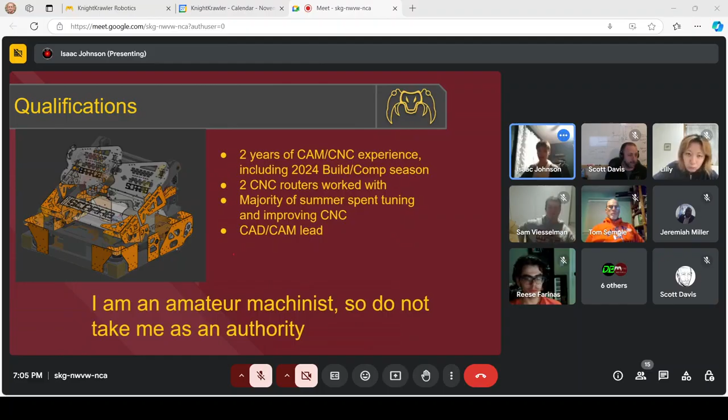So here's some pros and cons of, oh sorry, there's a thing at the top of my screen. Here's some pros and cons of our in-house manufacturing. So it's nice to be able to fix or modify parts during production, say halfway through a cut.

We find out the part has a flaw, we can just stop it, and we don't have to waste a couple days fixing that. And in the same vein, we have a quick lead time, maybe about an hour between finalizing a part and getting it ready for being put on a robot.

As opposed to, I'm not sure how long the lead time is for other teams, but I've heard it can be pretty long. Also operating CNCs gives valuable experience for the students on the team, and also insights into optimizing designs for manufacturing to make it quicker or easier or even possible if your design is not really optimized for that.

Then the last pro I could think of was after your upfront cost, you only have the material and tooling costs as opposed to paying for a part to be professionally milled or having a sponsor have to do it.

So some cons with that are there's a time investment in setting up the machine, learning to use it, setting up new tooling. There's also a steep learning curve in learning how to actually do all those things and in getting your parts to go quickly and not destroy your tools as you go along.

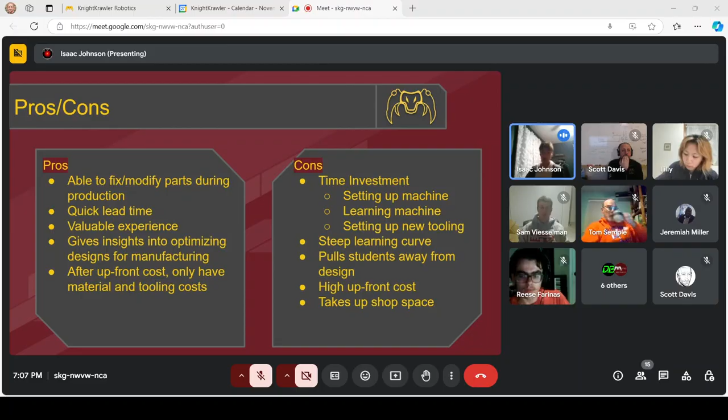Then, if you have a student doing all of your CAM work, it pulls students away from design and from other tasks they could do that they might prioritize. There's also the high upfront cost and the cost of shop space that the CNC takes up.

So some ways we've dealt with cons are for the time investment issues.

I've dedicated my off season to setting up the hardware, software, bit profiles, and getting our CNC ready for the challenges of the season. You can also experiment during downtime, say you just finished your last part and have the next 20 minutes free.

You can do some test cuts, work on improving your tooling, stuff like that. For the learning curve issue, you can start off by milling with easier materials like wood or plastic, and there are many videos and tutorials to learn best practices. I've seen a lot of stuff from Titans of CNC and Stoney CNC, and I've actually incorporated some of what their videos have taught.

You can also use your alumni and sponsor connections for resources or help. We actually had an alumni from 4 years ago help set up our CNC for the 2023 season and got us started with tooling and showing us how to actually operate it.

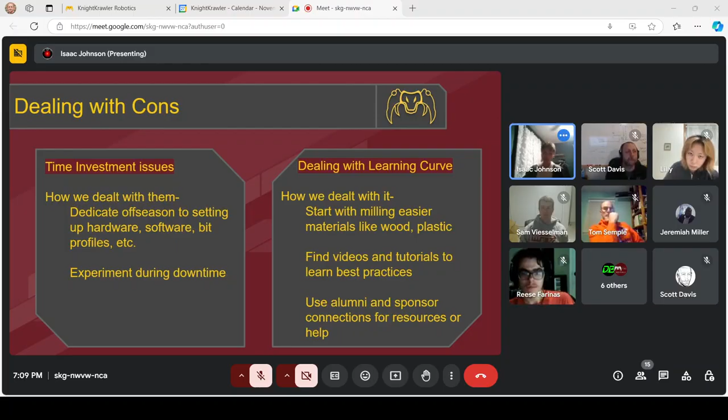For dealing with pulling students away from design, you can either have a mentor who's willing or able to machine if it's not a priority for your students to machine, or you can have multiple CAM students switch out machining duties. What I like to do is just CAM outside of meetings using all the available time that's not for schoolwork.

If you have a limited shop space like we do, we have a very small closet, you can place it in a shelving or low traffic area. We had it in the back of the shop for a year, and now it's tucked away, accessible but out of the way.

And lastly for that, you can also put the CNC in a mobile enclosure and just wheel it around.

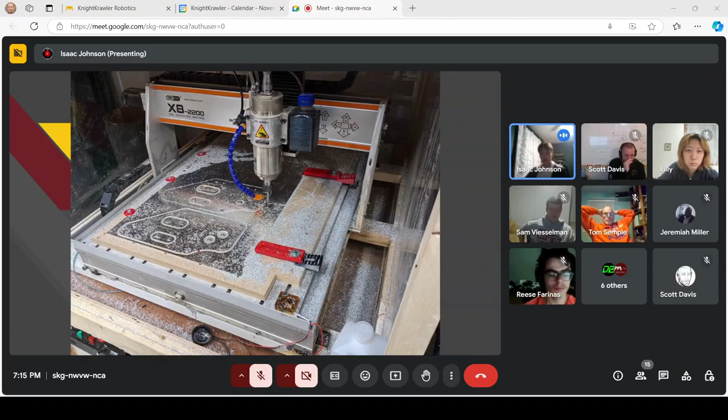And it's a good amount of effort to put the screws on because you can't just cut out your holes and keep going. You have to cut out, pause for maybe a couple minutes to secure the part, then keep going, which in the long run isn't too much of a hassle.

Something to keep in mind with using vises is when you're doing a contouring operation, you have to leave some clearance so you don't hit the top of the vise, which means there's a little pad at the bottom that you can't cut. So you need to flip it over and then mill off what you're holding onto before.

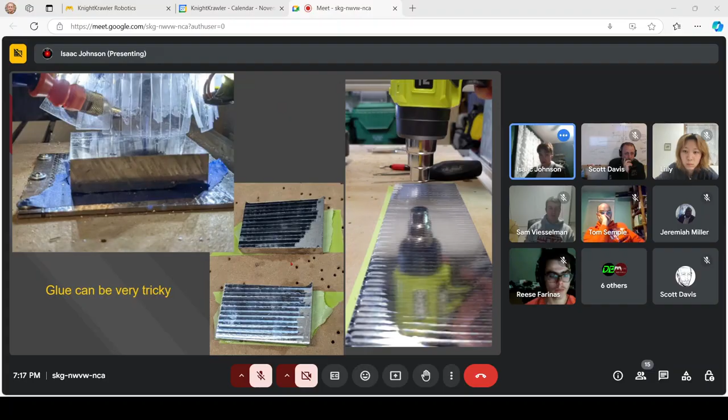And this is with a surfaced wasteboard. So to really get a good stick with your tape and keep large parts on, or especially smaller parts, you need to make sure you're dealing with the heat and have something flat to work with.

Then another thing about preparing your operations and actually mounting them is it's really nice to have a way to square or align your fixtures or stock that you put down.

So one way to do this is dowel pins, which I've played around with a bit—you either mill a hole into your wasteboard or your CNC or router table, and then put a pin in there that you can brace your part up against, which is nice.

Say you're doing a really small part and you're gluing it and it flies off. When that's happened to me using dowel pins, I can just take the tape off, retape, re-glue, then put it back exactly where it was and keep going with the new operation without even having to change to zero.

Another way to make sure you have a really accurate and square, secure part is, if you're using a vise, to square it up against your CNC or router table or wasteboard, using a square as your reference.

The last thing I want to talk about for this slide is squaring the side of your wasteboard. If you look at the bottom image, there's a ledge on the bottom because I ran a 1/8 inch bit along the side and cut that side of the wasteboard square, so I could put a square up against it and know that my stock is square.

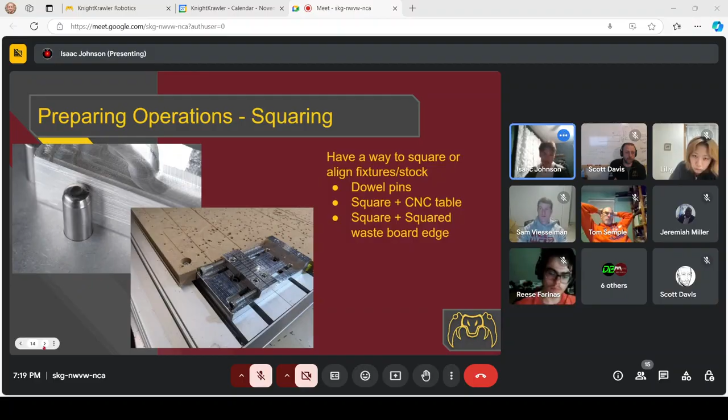Another thing about actually preparing your operations is a lot of the time your stock isn't flat, which is really annoying, but it can cause slight inaccuracies in your part, and it might lead it to not mount correctly onto where you're mounting it on the robot, or it might not be easy to put on the router.

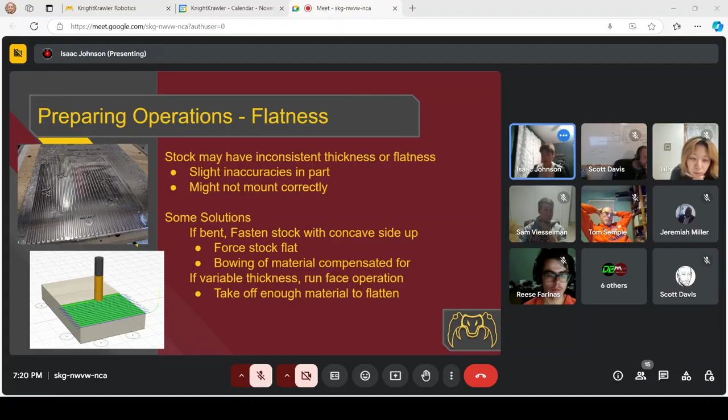A couple solutions: if it's sheet stock, fasten it with the concave side up so you can force the sides flat and cut it normally, compensating for the bowing of material. Or if it's a thicker piece of stock with variable thickness depending on where you measure, you can run a face operation, taking off enough material to flatten it. Then you can either go from there or flip it and flatten it again so you have a nice flat surface on both sides.

I've got an extreme example of some bowed sheet metal. The top image is some 0.1 inch aluminum for reference, but the bottom image is a piece of stock we've had forever. It's about 0.125 inches, but it's practically useless because of how much it bows.

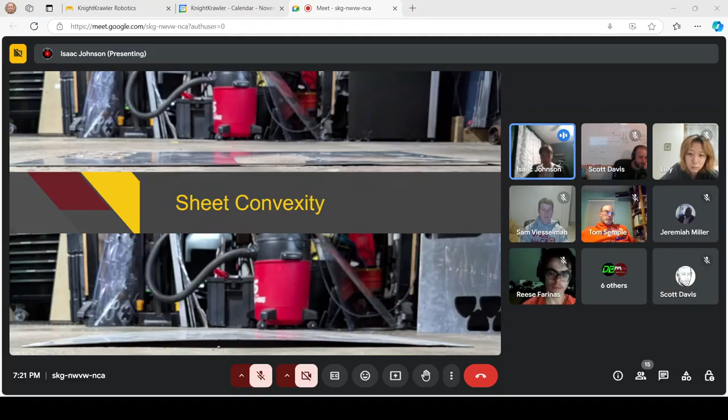If I were to use that, I've in the past cut off small strips of it to deal with the bowing, because it's less extreme over small areas. Or if I really needed to, I could secure the ends and really screw it down.

Then, say you really want to go for accuracy in a part, what I like to do is test tolerances. I've had some bad experiences with just trusting what I put in CAD to be accurate, especially using, say, a hex shaft or press fitting.

Some ways to make sure your part is as accurate as you can make it is to do a finishing pass, where you cut the full depth but leave some material on the sides to take off later with really small finishing passes. Or spring cuts, where you either have extra cuts where you mill it normally, then run your bit along the edge a couple times without taking off any extra material to deal with deflection.

It might cut more material than the first pass, just because the bit had more force pressing it up against it and deflecting it. So to get really flat sides or flat cuts and a really accurate part, it can help to do a spring cut. Then say you're doing a hex pocket like in the image here.

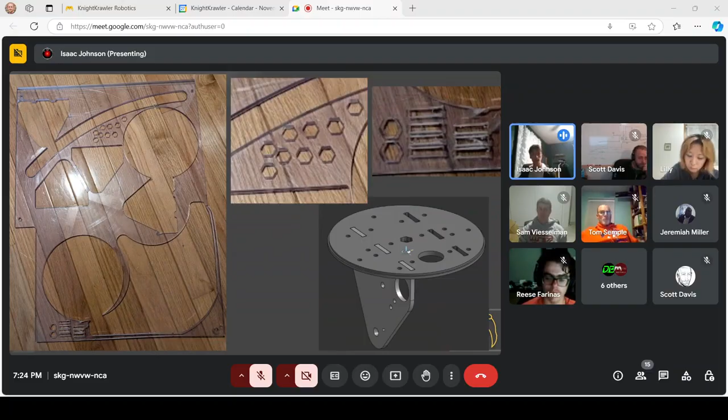I've actually got the piece of stock that I was testing on, right here. In the picture, I have a lot of hex holes, a lot of those little dog bone holes. I went and ran a ton of these operations to try and dial in the dimensions in the CAD that had the right tolerances, so I could get a really exact fit.

Speaking of accuracy and fit, here's a really wild concept: milling tools are round, but something less obvious is that this means they cannot cut sharp concave corners.

So I like to add pockets to corners and then use small tooling to minimize the size of the pockets. Or if you really want a sharp corner, you could file down the part. Or if you're putting a fitted piece in there, you could round the edges of the fitted piece instead. I've got a diagram of this.

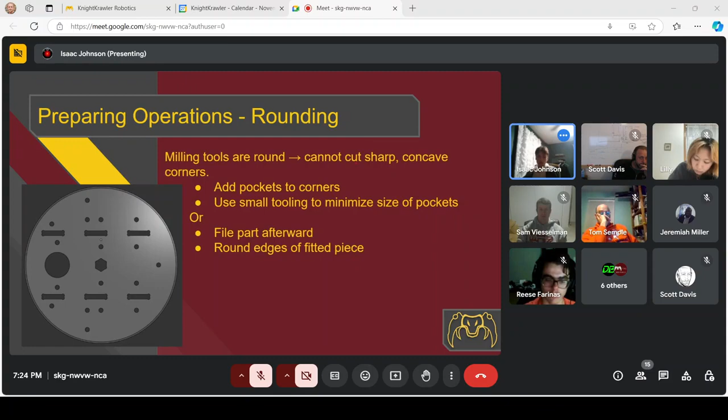Sam? Yeah, sorry, I didn't mean to interrupt you there. But I was curious, when you add those little rounds, do you do that as part of your CAM operation, or do you actually go back into your CAD model and do that?

Oh, that's a great question. I do it in the CAD - it's a little annoying to do, but I take an arc and set the radius, then make it. I put the midpoint of the arc on the tip of the hexagon, say if I'm doing a hex slot, so I do add that in CAD.

I've got a little diagram here of without the pockets. Since the bit is round, it's not going to be able to enter into the corners, and I've found that Fusion does not let you overcut to make sure you get a sharp corner - it just rounds it for you. This can be negligible if you've got like a 16th inch bit, but with an 1/8 inch or a 1/4 inch bit, you need to add pockets so you can tell the end mill to go straight in there and actually get your hole.

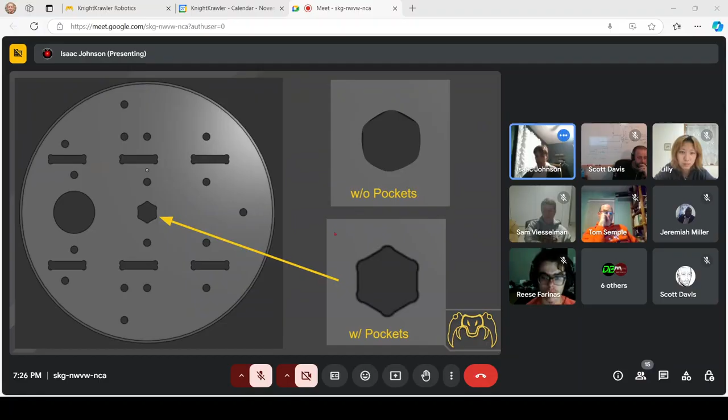So I add a little radius to all of my 90-degree interior pockets. Let's see.

Say I want to secure a bit of stock with screws or hold downs - I always make sure, and I've had issues with this in the past, to offset my zeros so that I'm at least 1.5 times the bit diameter from the screws and hold downs. Because say you're doing an outside cutting pass on your part, if you don't do any offset at all, there's a chance you run into the screw, and I've seen a lot of sparks fly from that - I do not want that to happen.

So just adding a little offset can prevent some tool wear, and make sure that if you're cutting out of a piece right on the edge, that offset can also ensure you don't run out of space on the side to cut.

Dr. B said, oh hey. Isaac, thanks - I'm from 2530. Thank you for this, by the way. It's really, really cool because we're just starting our adventure figuring out how to do this.

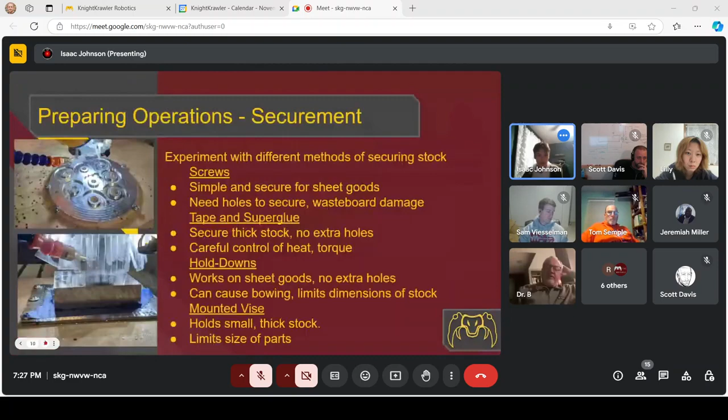Yeah, where is it? So we have T-nuts that slide into these slots, and it's hard to see in this photo, but right here we have some button head screws. So we just do T-nuts and button head screws.

We don't slide the T-nuts in first - we put them on the actual waste board, then slide it in just for ease of putting it in. And then you'd square up the board by cutting the edges with the tool, and then you'd surface the waste board so that it's flat, and then you do all your stuff.

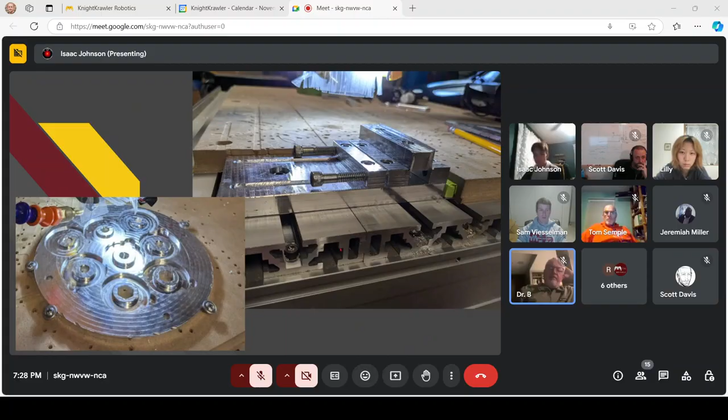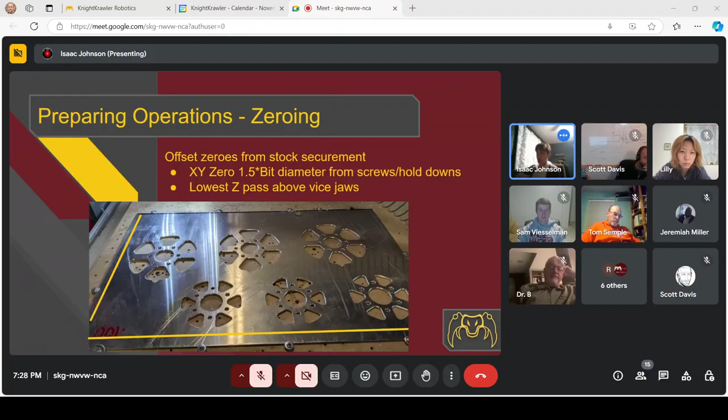Where was I? Oh yeah, so add a bit of offset. Also, if you're using vice jaws, make sure your lowest Z pass is above your jaws, just so you don't have to remill those because you ran into them. Any more questions before I move on?

Scott asks Isaac: when you're setting up your finishing passes so that you can take care of bit deflection during your regular cut, are you just doing one finishing pass, or are you doing multiple finishing passes?

It depends on the part. I like to do one finishing pass if it doesn't need to be too accurate, or maybe even none if it doesn't need to be accurate at all. But I'd go to two if you're trying to get a press fit or a close fit, or maybe even three.

I know you've done a ton of optimizing over the summer and I haven't seen the results, but in the past, when cutting stock that's bowed, we would always set up a couple of air passes so the bit would run along the top and shouldn't touch anything. But if your flat stock is bowed, it ends up taking some off so you don't take too big of a bite with your end mill and cause chatter. Are you still doing that, or does the way you've set up your milling with ramping alleviate the need for air passes?

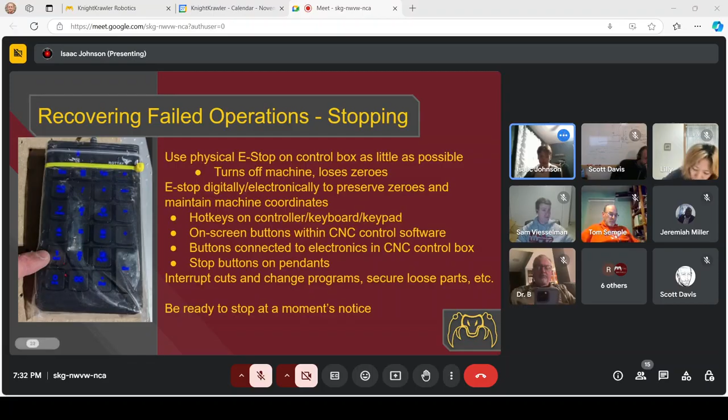So say you have a part you forgot to secure and you started a cut - you can just pop that button, move your spindle, secure it, then keep going. I always like to have this number pad ready, holding it while a cut's going on.

Then say you actually lost your zeros - say you had a power outage during an important cut, which actually happened this last year. A couple ways to deal with that: you can preemptively mark a zero point on stock just to be super careful, then reference off that point and keep your original zero.

But say you already cut some holes into your material, you can use any reference point - a hole, a specific contour, really anything you already machined - and line up your spindle with that. In the CAM software, here I've got an example of Fusion, where I go and change the zero to that reference point, then re-export all my operations to use that new reference point. So I zero at that hole and all operations go on as normal, which might be a bit off, but if you're careful it should only be maybe 100th or 5,000th max, unless it's a really big hole or something.

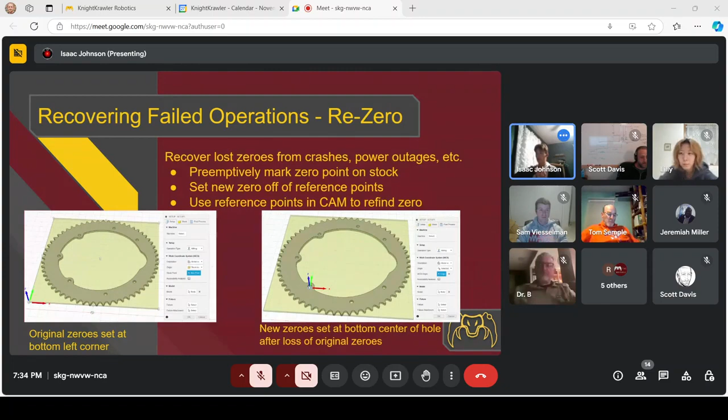Another option is to use that reference point to measure its distance from your original zero, then move that distance and reset your zero where you think your original zero was. I've got bigger pictures to show that I moved the origin with the stock point, or selecting the stock point in Fusion.

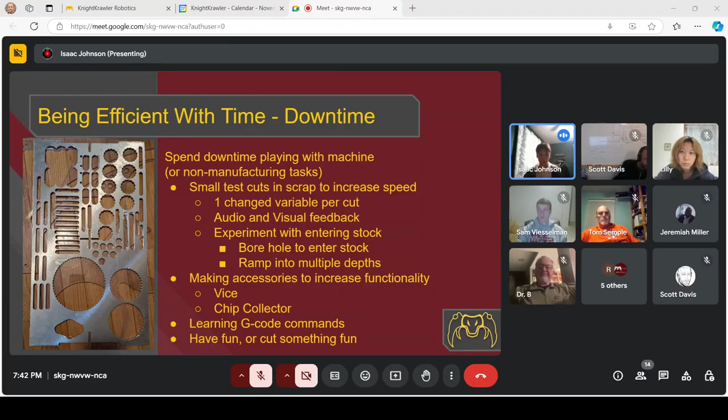Another thing I like to spend my downtime doing is making accessories for the CNC to increase its functionality, like making a vise to be able to cut smaller, more 3D parts easier besides gluing them, making a chip collector to reduce the amount of cleanup during or after a cut, and learning G-code commands just to get a better grasp of what the CNC is doing, what's being told. I also like to have fun with the CNC, like cutting a little Star Trek Delta insignia when I had a chance, just playing around with some brass.

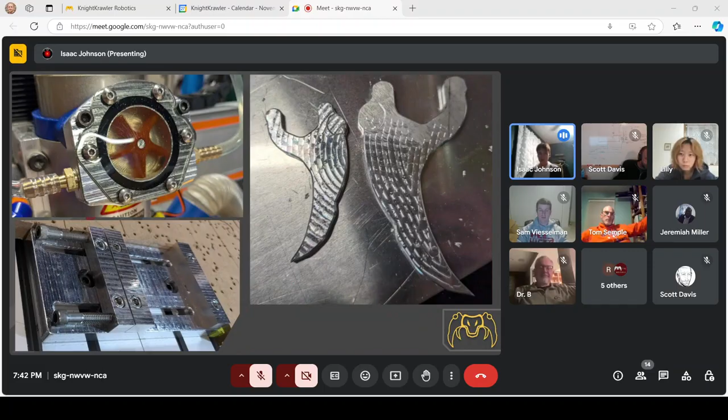Here we've got some examples of little projects I've done. I've got the vise I mentioned earlier, and some replacement wrenches for what we actually use to tighten our collets, because the ones that came with the CNC aren't the greatest. I've also got an indicator to show that coolant's running. So there's a lot of fun things you can do with the CNC that can make it work better. I'd spend time looking into those.

Along with working on improving your efficiency cutting, also work on improving your efficiency when actually programming using Fusion or Mastercam, whatever you use. I'm guessing there's an analogous feature in Mastercam, but Fusion has a thing called templates where you can right click on a program or an operation and save it as a template to use later. So you can save a specially tuned program, say you're entering a certain way and you want to keep it and apply that to another program.

Or I have multiple bore operations where it's preset with a tool, and I just bring in the template, and it automatically selects all of the holes that tool can cut, and it can do that real quick. So you can just have preset options for operations.

To make these templates takes a bit of time, and to improve them also takes a bit of time. So use your time off season to make it so you can program quicker. You can also update your templates if you learn something after a cut, and there's always new things to learn with them. A lot of the time you can go faster. Sometimes that's a bad idea, but most of the time it's a good idea to go fast.

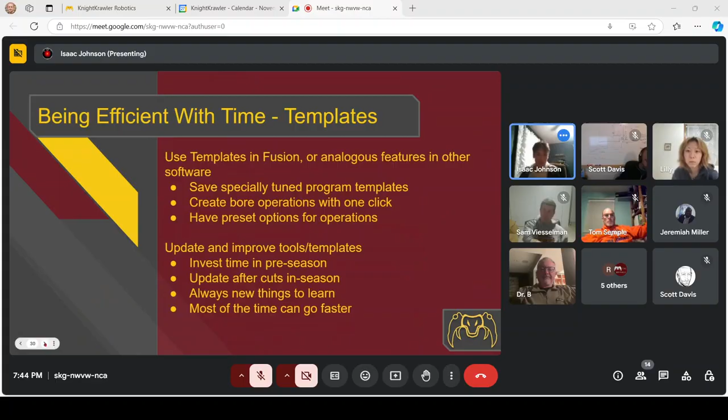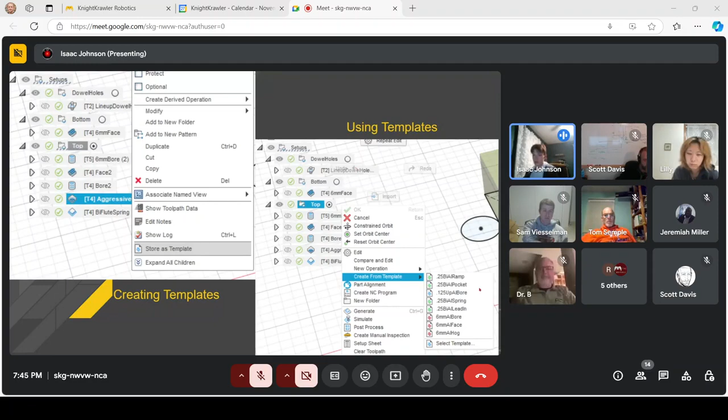So then I've just got a quick rundown for actually making a template. You right click on your operation, then there's a little store template box where it brings you to a new window to actually store it. Then to call upon it, you make a setup, right click on your setup, and choose create from template, and choose either ones you've used recently or ones from your general library.

And then, if people need, I can go over what a setup is and stuff.

But the last thing I have in this section is dealing with burrs. It's really nice if you're able to limit the amount of work you need to do after machining. Burrs are a big part of that because say you've got a plate right in the middle of a robot—I've put my hands in robots, I've reached in there, and I don't want to come out with a lot of cuts. So you need to make sure your parts are deburred and that they're safe. You can limit the amount of deburring with a chamfer end mill, just having the machine cut off all your burrs and give it a nice finish.

A spring cut helps, maybe not with an upcut bit, but a spring cut can take off a lot of your burrs, especially if you've got some remelted material on your part. And then my favorite, you can outsource your deburring to programming, because I've talked to some programmers and they love to deburr. Apparently it's relaxing, so keep that in mind.

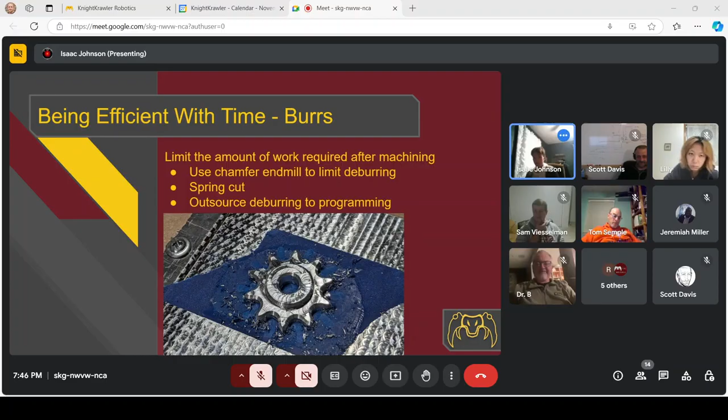You can outsource the manual labor. Okay, well what was your question, Dr. B? Actually I have two. I love outsourcing the programming. We have to steal the parts so the mentors don't do the deburring, because they love it too.

So honestly, two things. One is if you could share what you do for lubrication and your little lubrication flow meter, that would be really cool, because we have not done aluminum at all and don't know what to do with that. So what you've used for equipment, solution, and your flow meter would be cool. And I forgot my other question, but by the end of your answer I'll remember it.

That flow meter was for a water-antifreeze mix we use for our spindle, because it's water cooled. So that just shows it's actually being cooled and you're not generating a ton of heat accidentally.

But for our coolant, we use, I don't remember what they're called, but an adjustable tube. We blast our part, or the tip of our bit, and in general our part, with isopropyl alcohol, because it cools the bit and gives a bit of lubrication. It also evaporates in air, so if we accidentally soak the table or give way too much, over time it'll just go away and we won't damage our table, assuming we don't give it too much.

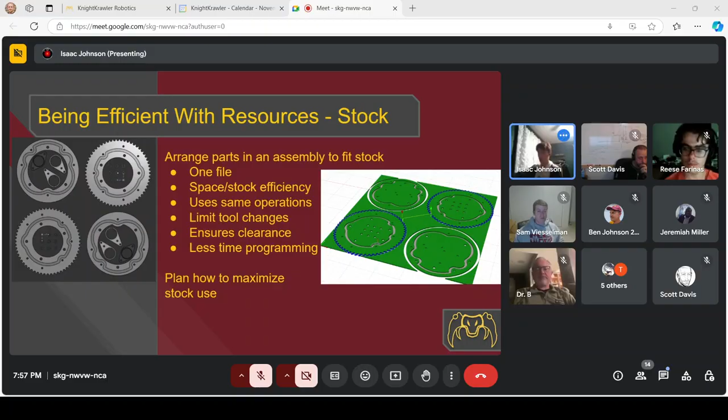I've got an example of how you can use the same program with the same file. So I have this arrangement of parts here. In Fusion, I have just one operation that does all of these bores, and that's with one tool, no tool change. I go through and do all the holes, then I can go through and do all the cuts with a larger 1/4 inch bit. So that's considerably less programming for the amount of parts you're making.

What's your question, Dr. B? I'm just wondering, after you do that first bore operation, do you then screw those parts down through those bore holes? Because we use tabs for some things, but those are painful. So obviously if you're doing a tool path and pausing to change your bit, do you just figure out which things need to be screwed down and screw them down?

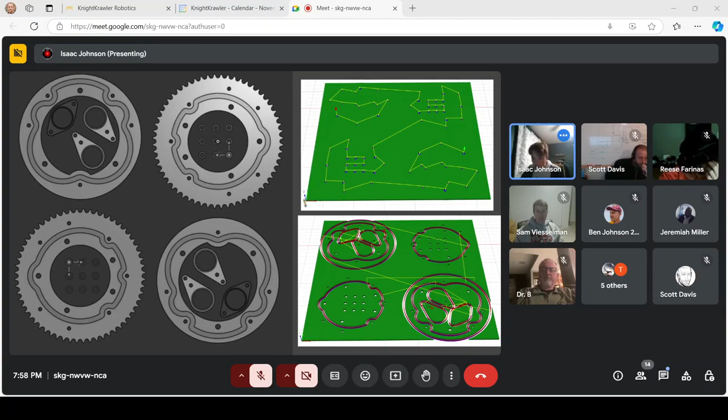Generally I try to have the laptop I do the CAM on near the CNC, often facing it, so that I can reference which holes I can secure and which ones I can't. This is really small, but say one of these holes on the ends of these parts is really hard to secure, and I need to know which hole is for that part because I need to use a special type of screw with a smaller diameter. So I generally secure those as or after I've done a tool change, just because the operation's already paused.

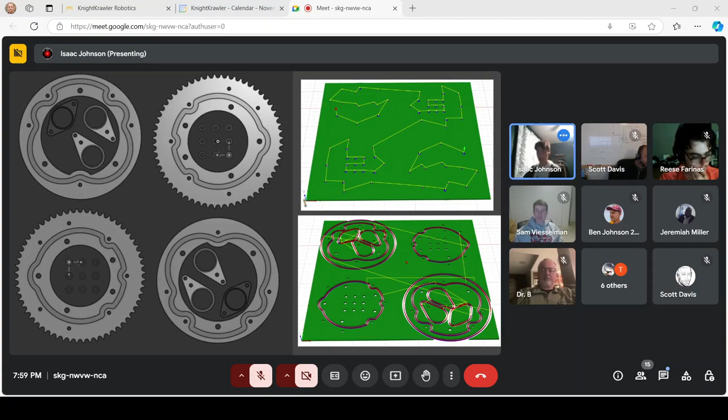So speaking of tabs, another way to be efficient with your resources is to save your cutouts. I like to secure a large cutout - say I have a part with a really large open middle, I like to save the cutout as scrap because then I can use it to test settings or make smaller parts. It's also faster to do a contour cutting operation than a pocket operation where you cut out all that extra material.

Some ways to secure those: if you're using screws, just drill the holes to secure it manually, or make a manufacturing model, which I'll touch on next, to have the machine cut out those holes so you can secure it along with the rest of your stock. If you're using tabs, it's easy - you just add your tab settings, but it's a pain to deal with, especially with aluminum and if your settings aren't dialed in. With glue and tape, it's pretty easy to keep your cutouts as long as you keep your stock cool and limit the force on the part. And if you're trying to save a cutout with a vise, I don't have any suggestion for you because that's not a good idea.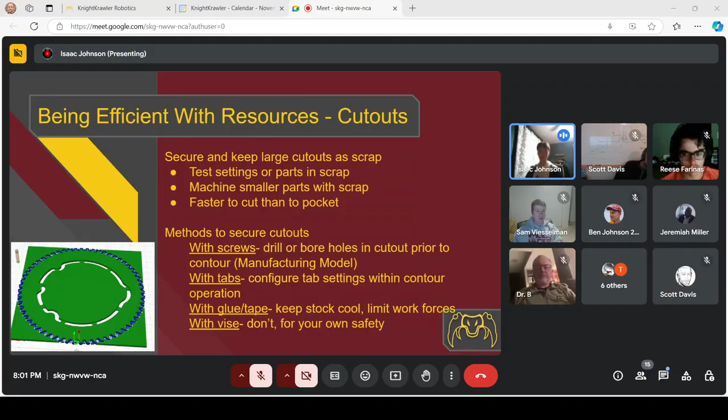Here's a diagram of the process for saving cutouts. What I like to do is make a manufacturing model where this is the original part, without that middle piece - normally it's got a big hole here. In the manufacturing model, done in a separate document, I make an offset for all these curves, offset by the width of the bit I plan to use. Then I make an extrusion and add holes to it so I can secure it. I add a little channel between the actual part and the extrusion in the middle I want to save, and make that channel 0.001 or 0.0001 inches thick so the inside and the actual part are the same model, allowing me to export it as one file and use those holes in the CAM software. When I do that, I add a negative 0.001 offset for actually cutting out that channel.

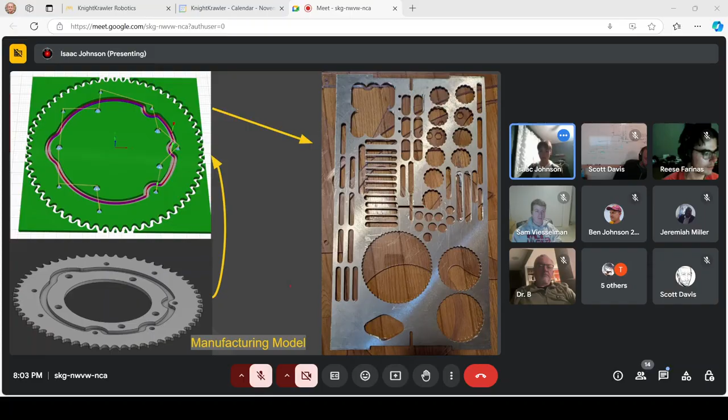The last thing for being efficient with your resources is finding good sources for them. Pretty much all of our stock for KnightKrawler comes from secondhand sources, just because it's cheaper and less wasteful. We get a lot of our plastic from Axman surplus stores, and sometimes they'll have some really nice polycarb for a good price.

We also get plastic or aluminum cutoffs from Cormark Metals in the Twin Cities, because a lot of companies need a big sheet for whatever they're using it for, but then they have a smaller leftover part of that big sheet they can't use, so it's sold at a discount, and that's perfect for our applications. We can also get plastic and aluminum from retired field elements - both of these pieces I have as examples are from retired field pieces.

We can also get scrap from parents or mentors, who can bring it from their work - that's how we get a lot of our thinner plastic. Then of course some occasional dumpster diving, like how that alumni got the CNC. I'd also consider pursuing in-kind donations or sponsorships from local companies, because their scrap can be perfect for what we do with it in FRC.

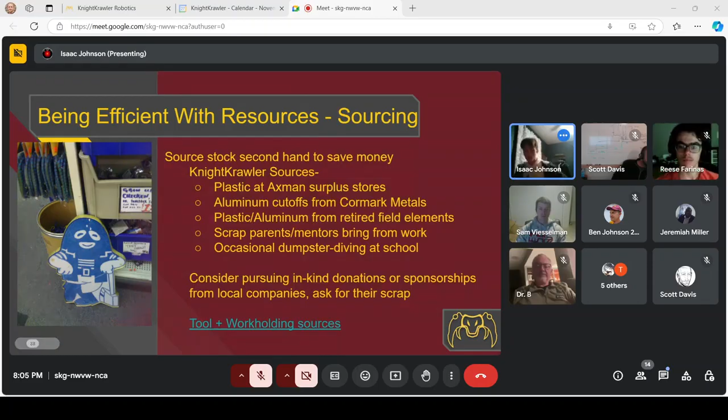Any questions before I go on to the next section?

The last thing I want to go over is machine and tooling health. I've got some general stuff for tooling and the wasteboard. One thing to keep in mind is that tooling is replaceable, but you should treat it to last, because one bit, especially a quarter-inch or larger bit, if you don't dull it, can last you a good couple of years.

A good way to make it last is to push it to about 75 to 85% of its limit, so you're not accidentally taking off too much material if you have a slight error in your program or something - give yourself a little margin of error. You should always be using coolant or lubricants when cutting metal, so you don't build up too much heat, because heat is what actually dulls your bit.

Another thing to keep in mind is how deep you're cutting. Especially when doing a pass in sheet goods, you have 180 degrees of contact with the bit when cutting a channel. I have a diagram here - as this hypothetical bit moves forward, for every amount it moves, it's always pushing into material in front of it and to the sides of it, so you're taking off a lot of material at once.

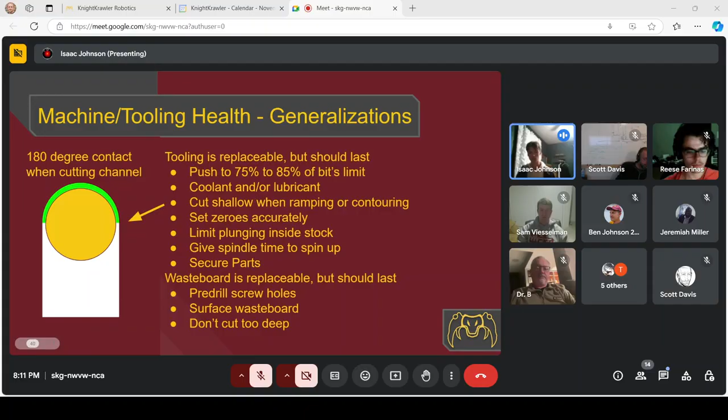Just a little bit on wasteboards. I think this is one of the last slides. It's replaceable, but it should also last. One way to improve how long it lasts is to pre-drill the holes if you're using screws, because when you screw down, the threads are going to pull up on the wasteboard. If you don't have a hole for it already, it's going to displace all that material up and cause a bump, making your table not flat, and it might tear the table. Whereas if you pre-drill, the threads still pull the material up a bit, but on the sides of the screw, the wasteboard has space to compress. And lastly, don't cut too deep with your cutting moves, to avoid scoring the wasteboard too much.

I've got a lot of pictures coming up. So that was a lot of talking, but now some visual aids.

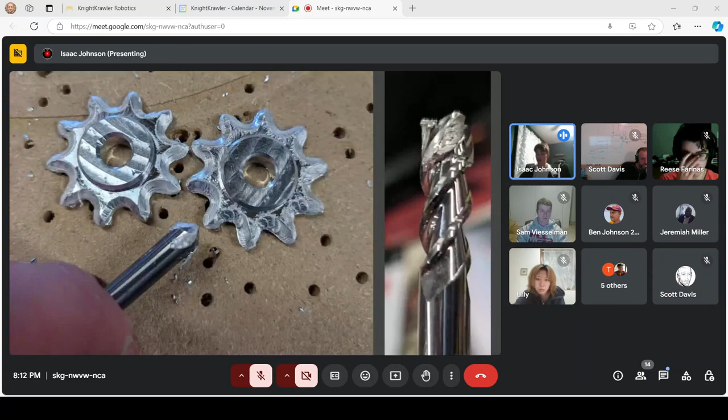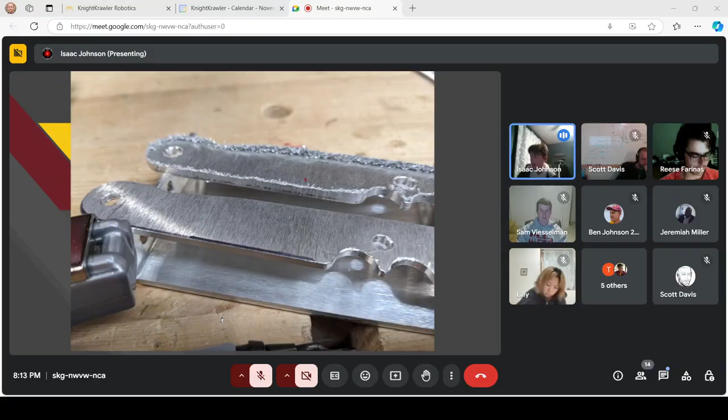Last thing I want to go over is a quick CNC fail video of my own. It's a bit loud.

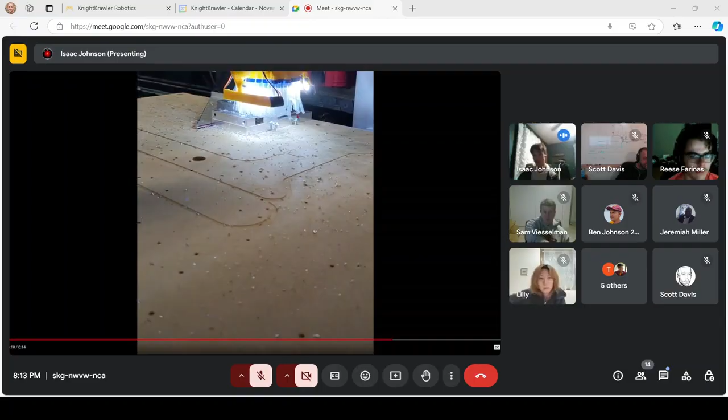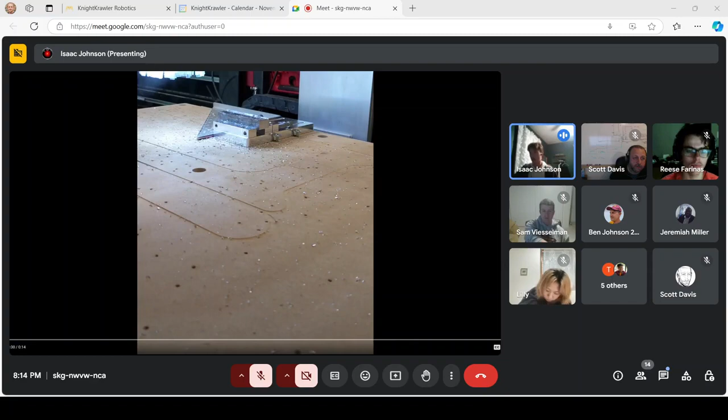Over here, I cut a bit too deep, and it comes up and I break it. So this is a good example of why you actually secure your part—I had this whole vice assembly secured with, I think, 4 screws, and that was not enough. The vice got pulled up and it actually broke the bit. It damaged the waste boards, and there was a lot of force acting on this just because of how deep I was cutting.

Be nice to your bits. I'm just gonna run that again, but I like this video.

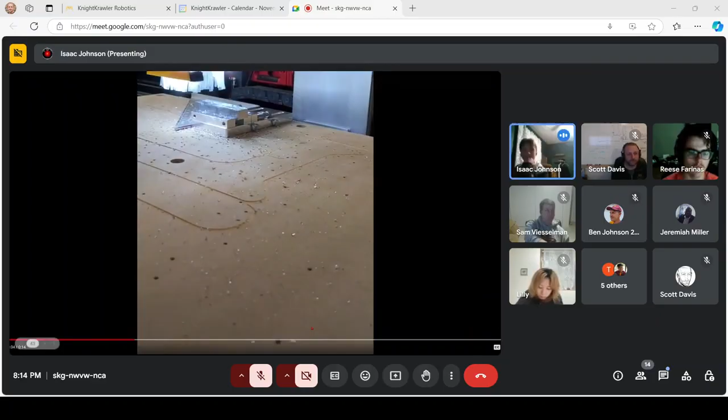Okay, then one last picture, then I'm done with my presentation. This is our old wasteboard. So over here, that's where we use it the most, and I've got a lot of craters here just because I didn't pre-drill any of these holes, so all the material was forced upwards. And this, it's just not level at all.

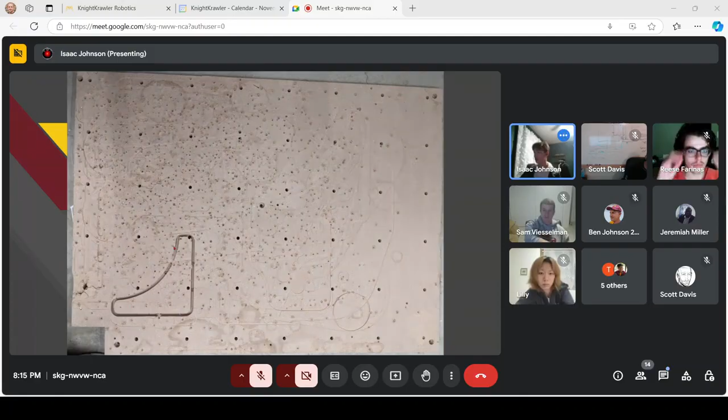Even with surfacing the board, it would take maybe taking off 1/100th of an inch of material to get it flat again. Over here, I didn't tighten the collet enough, so it ran—the bit fell and actually cut all of this, like 3/4 of an inch deep into the wasteboard, so I couldn't fasten any holes that happened to fall in this groove.

And then I've got a lot of water damage from isopropyl, where I just let the coolant drip down accidentally. So be nice to your wasteboard so that it can last you longer than this one did. This only lasted about a season.

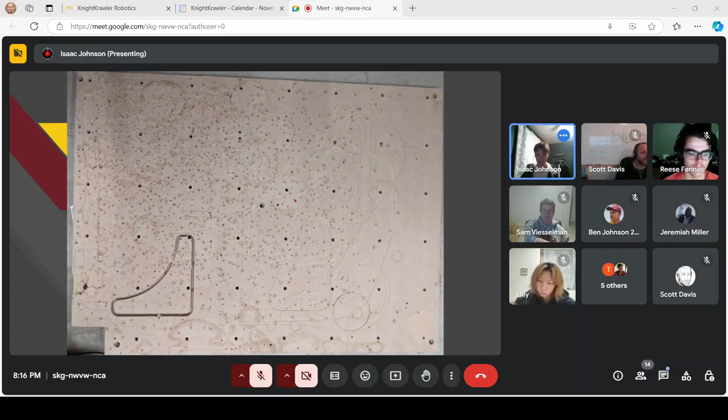Oh okay, I guess I got one last thing—your tool size matters. Those smaller tools are good for precision, but you can't get as much chip load with them, so you can't get as much feed rate, because they physically have smaller flutes to cut. Also they have less material on them since they're smaller, so they're going to be weaker, and since they're weaker on harder material, it's really easy to break them. So a good rule of thumb is to limit how many tight spaces you need to cut on harder material, just so you don't risk breaking any small bits.

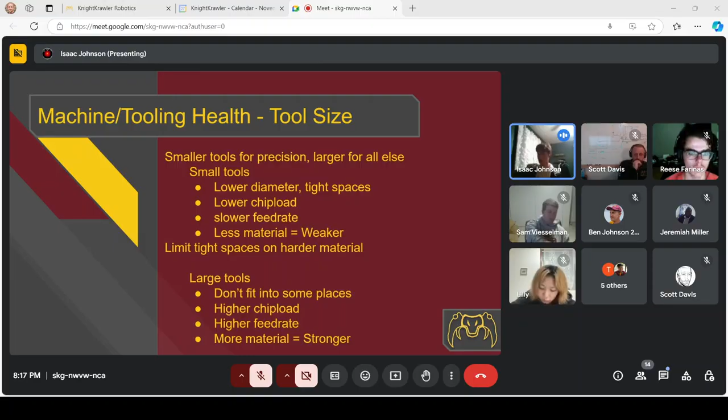Then large tools—they don't fit into a lot of places, but you can push them with a higher chip load and a higher feed rate because they have larger flutes to actually cut the material. Since there's more material on the actual bit, because it's larger, it's stronger, so you can run it harder. And that's all I got.